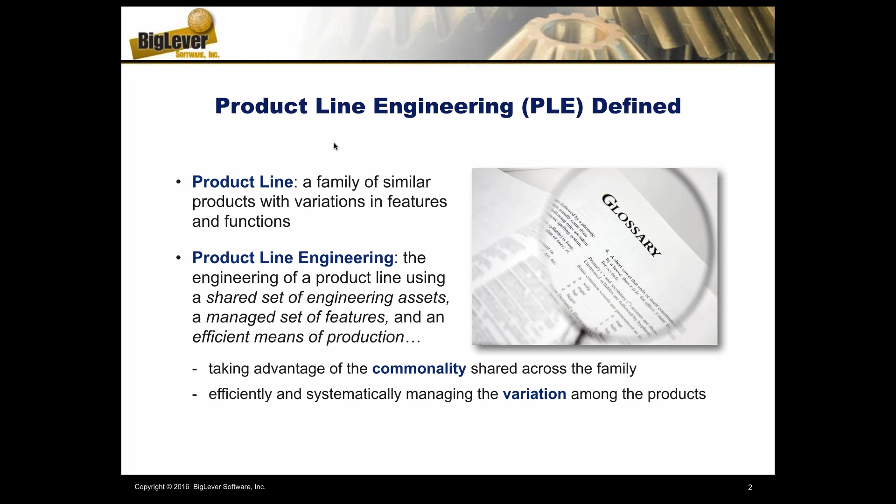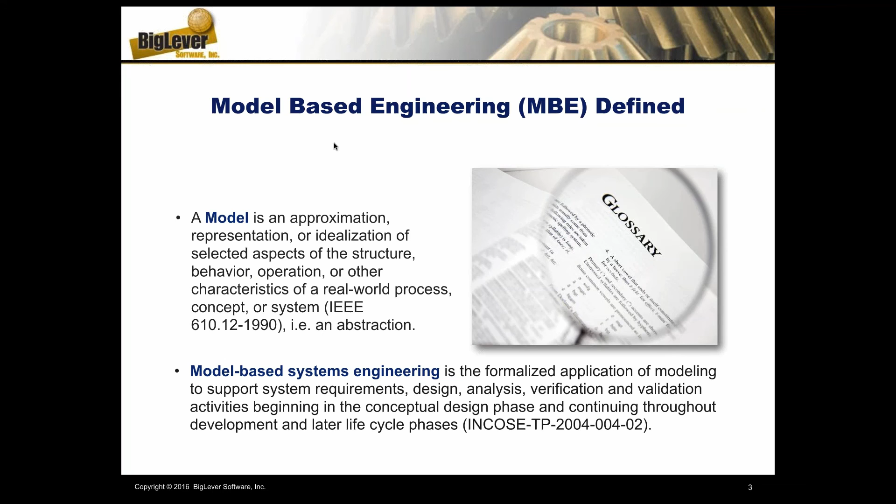The model-based engineering field is probably much more well-known than the product line field, so here are some simple definitions. Models are meant to provide abstractions for real-world systems or processes. For example, model-based systems engineering looks at models in a very formal way to support the systems engineering lifecycle - requirements, designs, testing, simulation, analysis - and we collectively refer to systems and software model-based engineering as model-based engineering, as a unified concept.

Just a little background on BigLever. Our role in the community is very focused on product line engineering - that's all we do, that's all we've done for our 15-year history in commercial practice. We have tools, we have methodology, and we focus on the organizational change required as you're adopting product line engineering into an organization. It's a different way of working, a different way of thinking. It requires more change to the organization and culture of a company than a lot of other engineering disciplines, so we focus on helping companies deal with those organizational change issues in product line engineering.

We have a framework that enables us to create ecosystems and partnerships, and our partnership with No Magic, for example, is our way of bringing Magic Draw Cameo into the ecosystem to make product line engineering work as an extension to those particular tools. Our framework and ecosystem are designed to help end organizations use the tools and assets they have selected and have been using historically, but extend those in order to better support product line engineering.

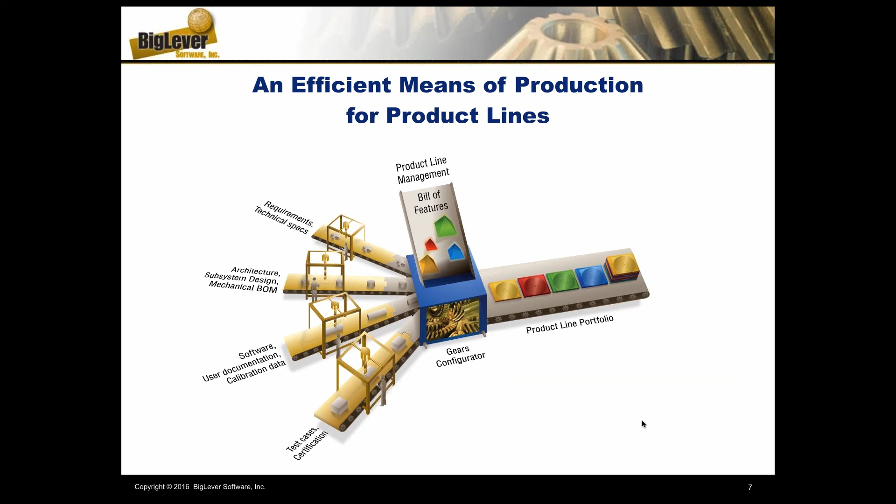The factory in this case is not producing physical artifacts, it's producing the digital assets that we use in the engineering of a particular product family. So you can see here on the left side of our conceptual abstraction about this product line factory, the supply chain coming into the factory in the middle comprises all sorts of artifacts found across the systems and software engineering lifecycle.

So things like requirements, designs, could be mechanical bill of materials, could be user documentation. All of these things that are produced to support a family or a portfolio of products, we're going to engineer in a way that enables and supports an entire product family to be supported from that collection of assets coming in on the left. That supports our entire product family.

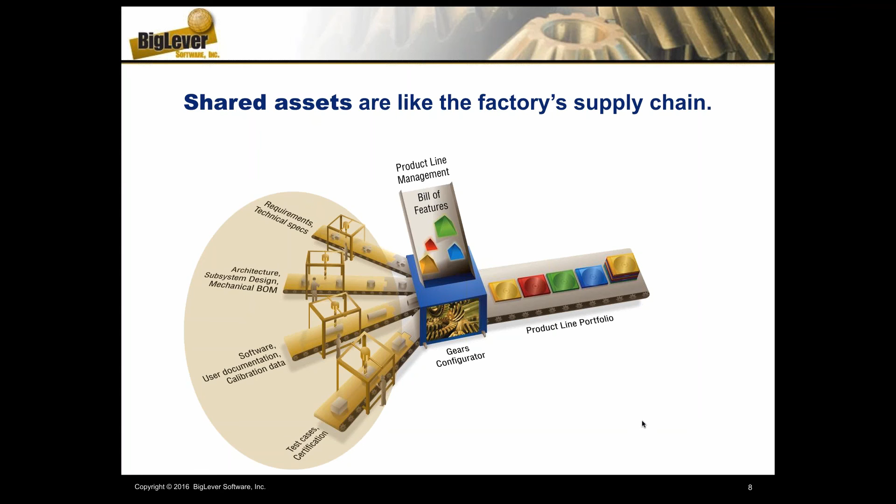To help drive the automation, we use this abstraction I mentioned earlier, referred to as the features. There are a lot of definitions of what's a feature across the engineering field, but in this case it's a very specific definition intended to provide features from a product line perspective. It's those differentiating characteristics that identify those things that are different from product to product in a product family.

You can think of it like the options. When you go buy a new car, you have a list of options—what features do you want on your vehicle and which features do you not want on your vehicle? So you can think of this as a very abstracted view of variants and options being offered on a particular product family.

And then the second piece of that is for every product we want to produce in our factory, we go to the feature catalog and choose which features we want on this product, which features are not needed or not desired on this particular product. So you're stepping through your feature catalog of offered feature options, and picking and choosing what's in and what's out for a particular product.

So you'll get a collection of this bill of features, one profile or one definition of features for each product that you want to produce in your product family.

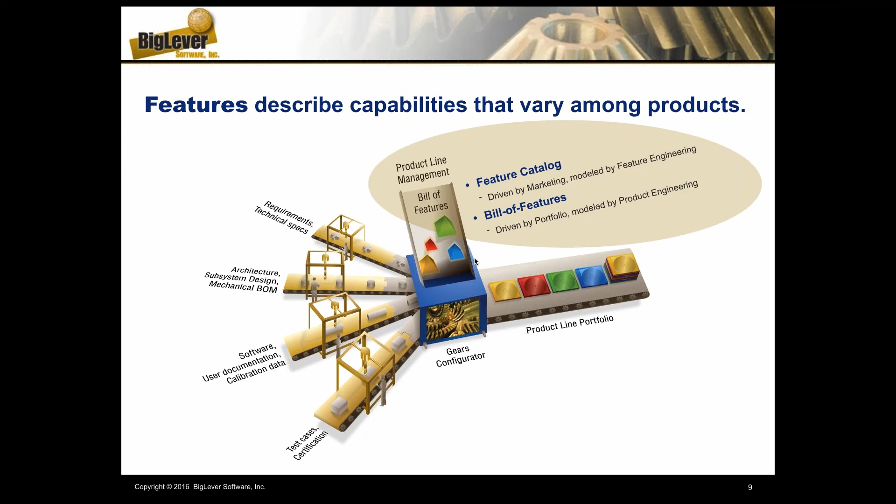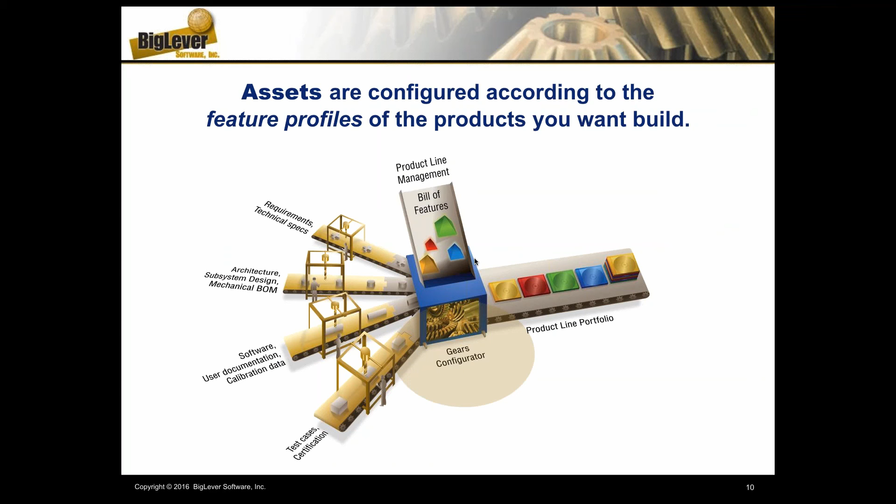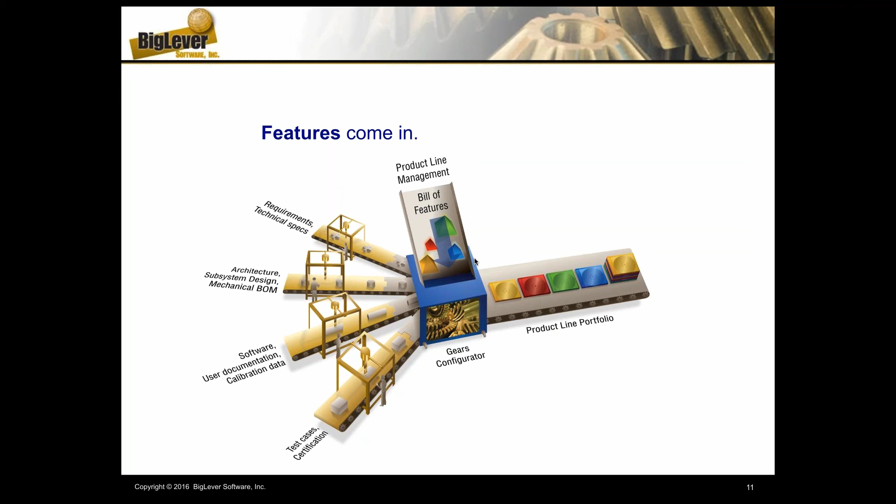Then we apply automation, and the automation will look at that model of the features that we want. It will look at the assets coming in from the left, and it will produce the appropriate product asset configuration to support that feature set. So the bill of features comes in the top—that's the request of the product configuration we're interested in.

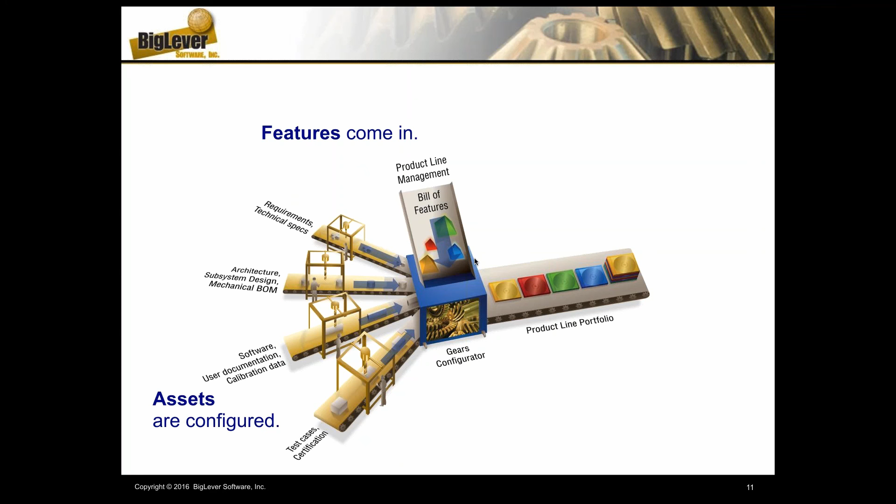The assets that are created and available to support that come in from the left side of our factory, and then a product comes out that matches our bill of features characterization that gives us requirements, designs, source code documents, whatever assets are being managed in a product family. Those things will come out the right side of our factory, and we can do that for many different configurations of product within a product family. So conceptually, it's just like a factory working on the digital assets that we use in the normal systems and software engineering lifecycle.

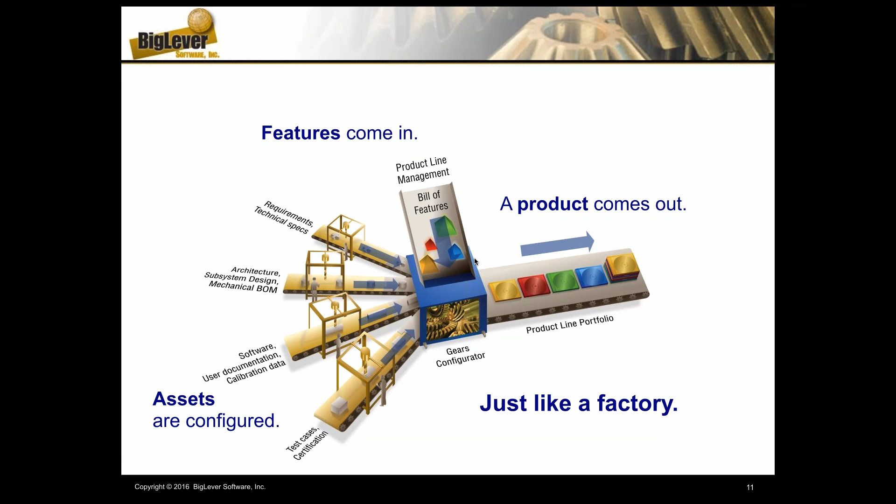This is in contrast to the way historically we've thought about building product families in the industry. Historically it's been what we refer to as product-centric. You tend to think of what do I need to do to deliver each product, and then we coordinate with the other products being delivered out of that product family to reuse, share, or take advantage of things that are common. So we see a lot of branching, merging, cloning, owning, copying, and talking to people in the hallway to get this particular job done.

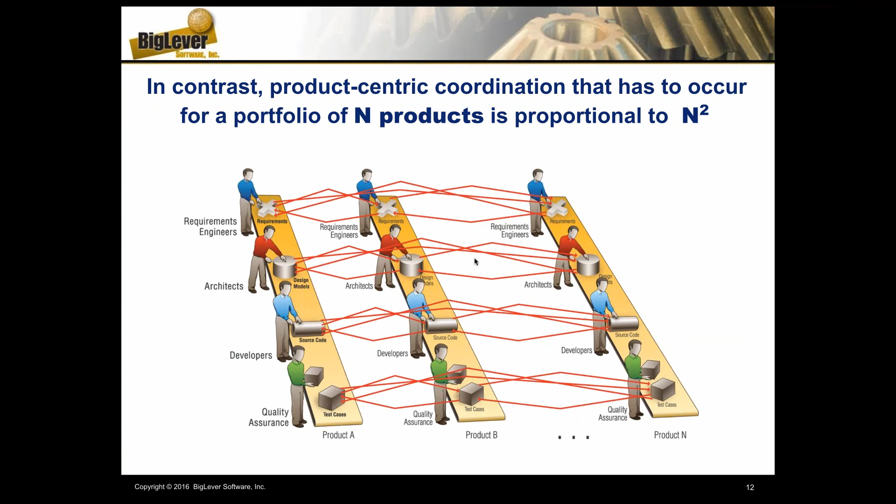The reason this approach has reached its limit of value in the industry is that if you look at a product family with products in it and do the math on the red lines of communication and coordination required, those red lines are proportional to n squared. So as you add more products to your product family, the complexity of managing things this way grows polynomially. We know eventually our engineering capability will be overwhelmed by complexity under a polynomial complexity growth curve. So what we're doing with product line engineering is asking, can we come up with a new approach to tackle n squared complexity?

Of course the answer to that is our product line engineering, feature-based, factory-based approach to doing this. That will bend our complexity curve flat so that we now have a linear growth in complexity as our product family grows over time.

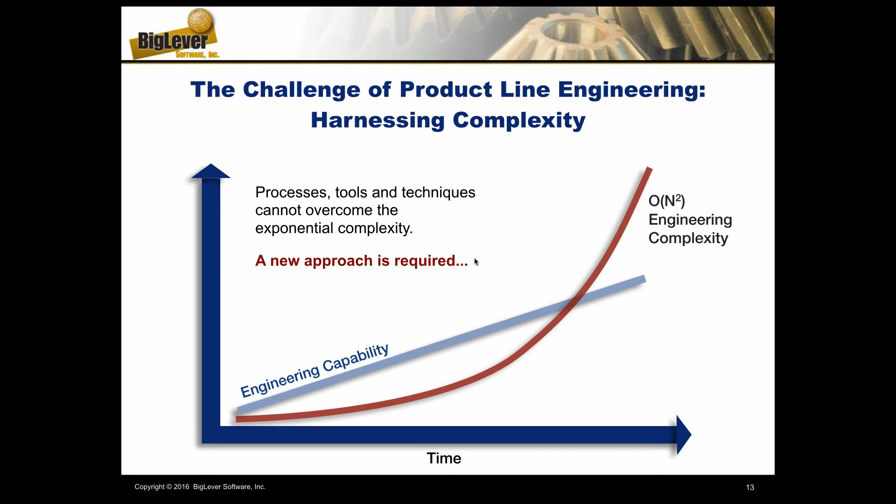We're going to create a model of the differentiating characteristics. Our feature model is going to drive the process coming in from the top so that we can feed in the various feature profiles to automatically configure and generate the assets that are needed for product A, product B, and product N.

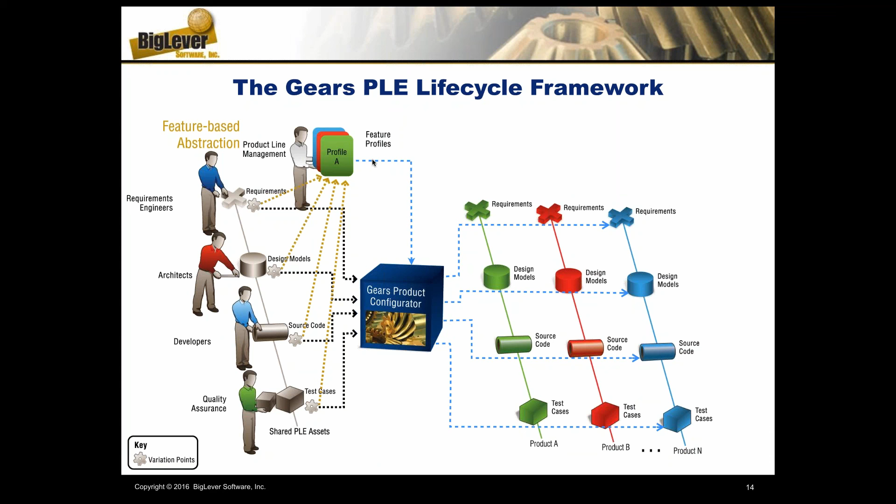So thinking ahead, when we talk about our integration with Magic Draw, what we've done is create, through our integration, the ability to turn model elements into variation point model elements. These model elements are part of our design model over here on the left, but some pieces and parts of our models are now optional or variant, and those are related back to the BigLever feature model that we use to drive the configuration and the automation.

So what this does now is our engineers over there on the left, they can think very broadly across the entire product family. You'll create your designs, your requirements, your assets across the lifecycle according to features, thinking broadly across the entire product family rather than engineering one product at a time according to the old siloed view of the world where people were huddled around and focused on individual products.

We talked about reducing the complexity, the n-squared complexity problem. We can see now how this happens. If I find a defect over in a product that was delivered out of my factory on the right, I ask the question: what is it inside of my factory that caused this defect to show up in a delivered asset coming out of the factory? And so we can find the root cause of that issue.

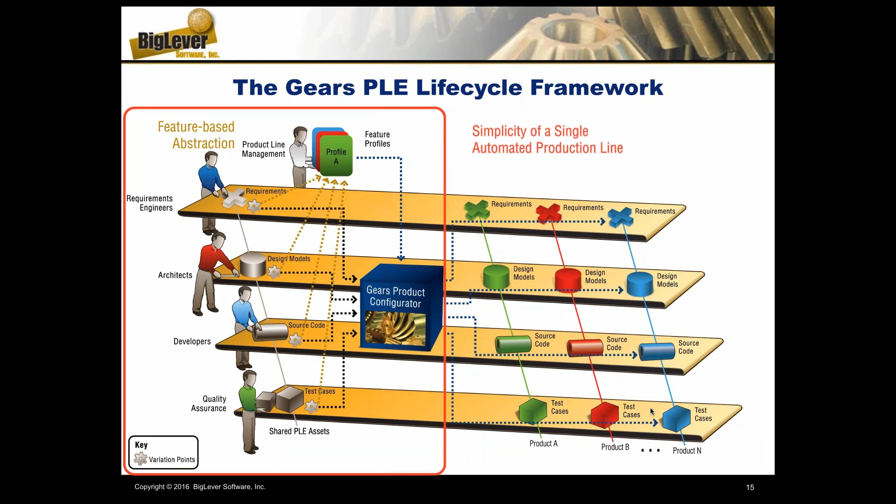We can fix it once inside of the factory, regenerate that product, or maybe the set of products that are impacted by that defect. Now we find the issue once, we fix it once in the factory, and we're going to regenerate anywhere from 1 to n products and redo the delivery there. But because it's at most n products we're delivering, we've reduced our complexity down to order n. We're no longer dealing with this cross-product complexity, because everything goes back to the factory as the single source of the truth about where artifacts are created, engineered, defects are fixed, enhancements are made, and so forth.

So this is really the key. If we look at what we've done under this approach, we still do all of those things we do in the engineering process. Whatever your organization does, every organization tends to have their own unique layout of the engineering V lifecycle. People will still do their requirements and their code and their models and bill of materials and their tests and their user documents, their calibration data. Whatever it is that you do today, you'll continue to do that.

But now what's happening is that sitting in the center of the V, there's a new model being introduced. It's this product line diversity model about features. Everybody, no matter what asset they're building, is looking to that feature model and saying, what are those things I need to support in my particular discipline across the engineering lifecycle? What are the ways that this diversity and variability being modeled in that feature catalog, how does that impact my work?

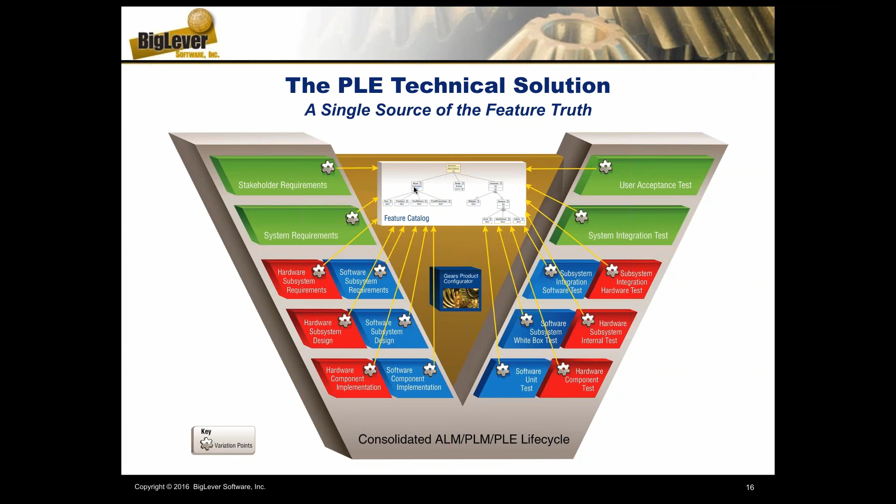So now if we take that and say, what does this really look like in operation? What are the new roles and responsibilities that an organization needs to support? The answer to that is shown here.

As we decide which products need to be produced in our product family, either through commercial market studies, or if you're in a business model where you're producing specific products for specific customers, then these would be customer-driven feature choices being made for each of the products you deliver.

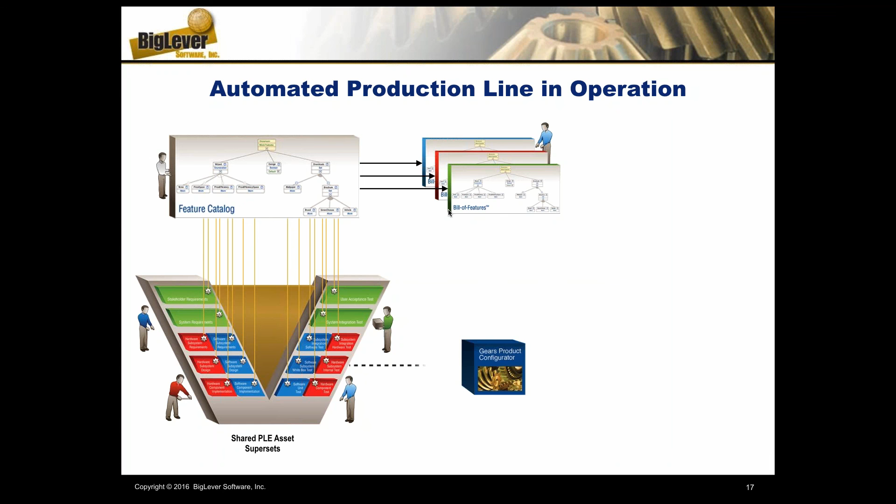Once this is in place, now you can do the fun part, which is feed these profiles into the automated configurator, and out on the right-hand side comes a filtered set of assets that are filtered according to the features in the bill of features profile.

So a couple of questions, let me look here real quick in my question queue. One is, will a presentation be available as a PDF? Yes, we can certainly make that available.

I'll coordinate with our friends at No Magic to figure out how we can get those distributed to you. And the AP 233 standard, I am not familiar with that one, so I actually would not know the answer to that question. Maybe if you can type in more detail about what that is, I'll be happy to look into it. There are a few standards for product line engineering and model-based engineering that have come online. ISO, for example, has a product line standard, and I'm on the committee that helps devise that standard. So we tend to do whatever we can to adhere to and follow those standards as we go.

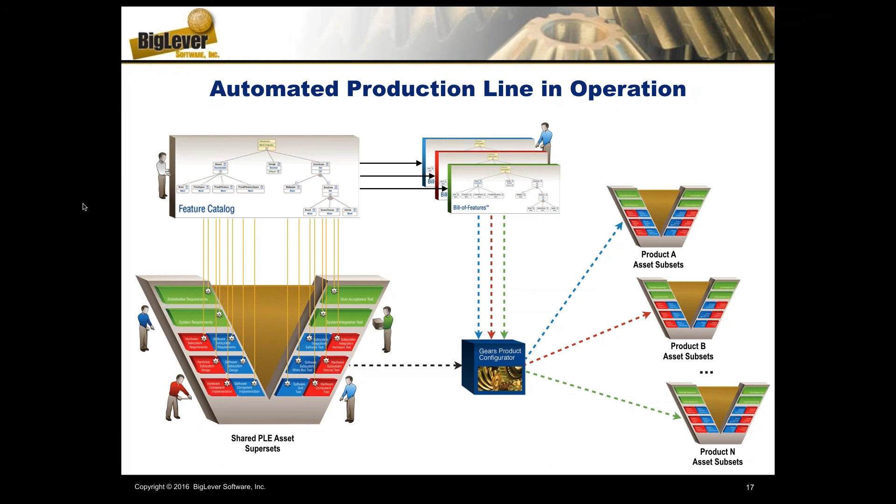So if we look across the life cycle, the way organizations and individuals absolutely need to work under product line engineering is to continue using the tools they know and love and work with. It would be really bad if we said, to do product line engineering you need to start from scratch and use a whole new set of tools, that you have to get rid of your old tools. That would be silly, and nobody would ever do that.

So what we do is represented here in this ecosystem. On the right, we have this product line framework that we provide from BigLever. There's an API that provides access and integration, giving other tools access to the feature models, the automated configuration capabilities, and the ability to create variation points in your assets.

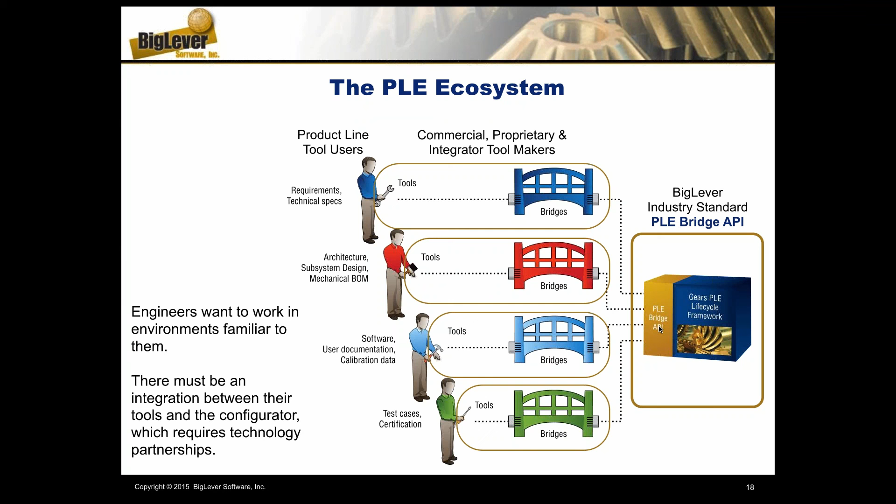For example, in our No Magic integration, what we do is create a bridge between that tool and the API, and by creating these bridges, that's what adds a tool into the PLE ecosystem provided here at BigLever. So there's a long list of partners.

We tend to be very customer driven. If we have a customer that wants to do PLE, they'll request integrations that are currently not in our portfolio. We're of course focused today on the No Magic integrations into this ecosystem, but most organizations have a significant collection of tools from a lot of different vendors, and we try as best we can to support the needs of our customers.

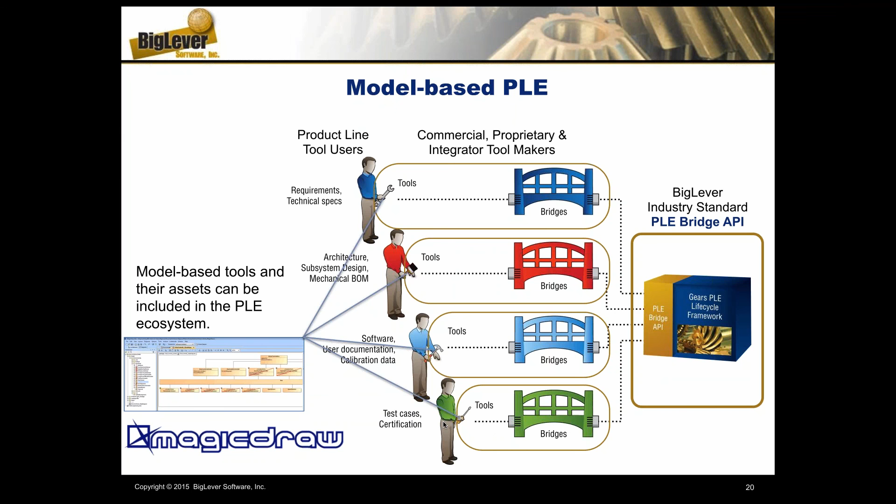From a MagicDraw point of view, however you use MagicDraw—whether for requirements, system design, model-based software development, or model-based testing—you can think of how that integrates across the life cycle to get your work done. The bridge and all the work to support that is now in place, thanks to a very nice collaborative effort we've done with the No Magic organization.

One of the subtitles I put up when we started is that product line engineering is really a new dimension in model-based engineering. That's a way of thinking about the relationship between model-based and product line engineering. I have a couple of slides here to point out what that really means—how do you think of this new dimension or new facet of model-based engineering?

From a product line point of view, we use this slide to say that in order to have a complete technical solution for product line engineering, you need this multi-product dimension, which is what we've talked about a lot so far today—how do I get product A, product B through product N delivered out of a factory? We've referenced the idea that this is not just for one particular asset type; it needs to support the entire systems engineering life cycle.

The issues in this multidiscipline dimension relate to traceability and common techniques, and the single source of truth about features and how it impacts all of these artifacts. How to bring product line engineering into multiple disciplines is a key part of a solution. And of course all of this has to evolve over time—when you do this, you don't end up with a set of shiny reusable assets that sit on a shelf for months and years on end.

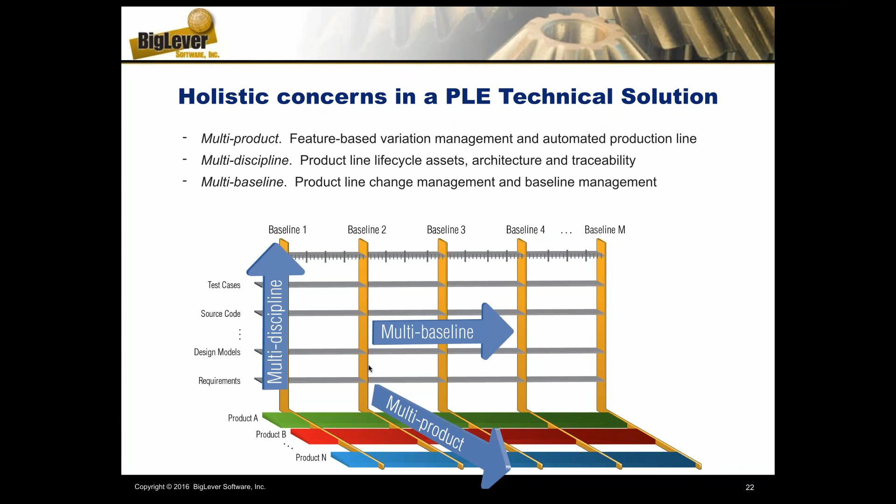So how this relates to model-based engineering versus feature models, oftentimes people at first glance will say, well, hey, I can just model features in my UML or my SysML models. Why are you giving me something additional to work with? Well, the answer to that is sort of reflected in that previous slide. They're really separate concerns. So in your model-based models, you're modeling things about your particular domain, your particular system, your particular family, behaviors, concepts, constructs.

The product line feature models are looking across the product family and saying, let's look at those differentiating characteristics. What are those concepts that would cause one product versus another product to be different within my product family? So it's not now talking about behaviors or concepts in the actual systems that are being delivered. It's in that orthogonal dimension that says, let's talk about the options and the variants and the differentiating characteristics. By keeping those concerns separate, it's going to simplify the comprehension, the reasoning, the rationale behind what's in your feature models versus what's in your system and your software design models. So that's sort of a key piece that we've discovered really helps simplify the overall process.

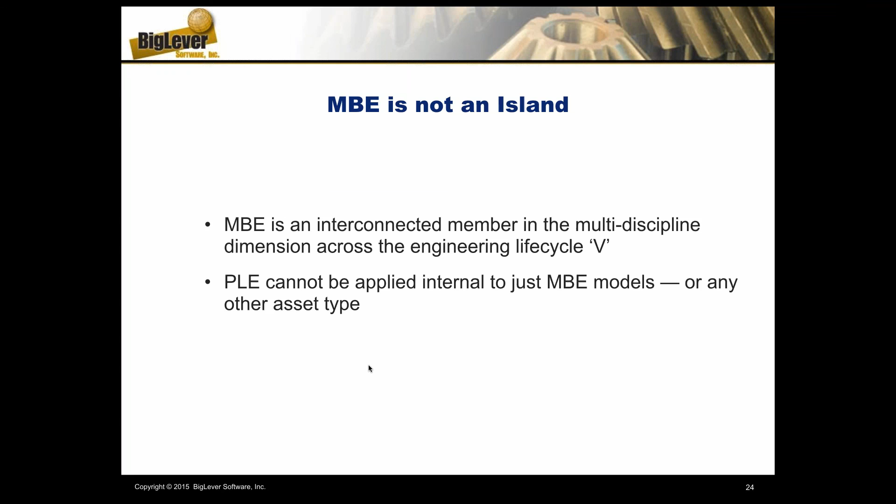Okay, so before we jump into the demo, just want to mention that as well. The tools and the technology we talked about, there's some additional activities that need to be supported. We talked a little earlier about organizational change. You can imagine that moving people under a factory approach will create new roles, new structures, new process, and so there's organizational change that occurs. In order to best support that, we tend to get the business involved in this as well to really connect all of this change with the business objectives and business opportunities. And so we have a methodology that supports not just the technological ideas here, but the organizational, the process, and the business objectives, and getting all of these things connected together.

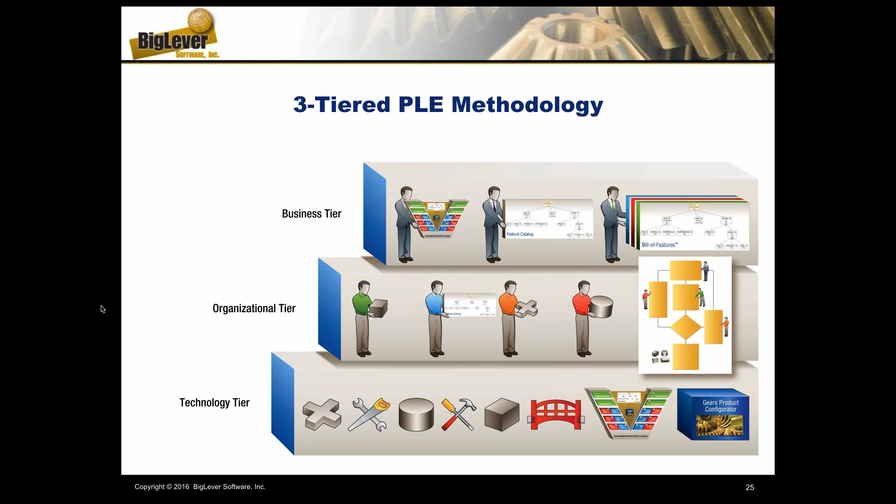Moving ahead here, again, just to summarize, the idea is we're looking to really significantly improve engineering through this product line engineering approach, high degrees of automation, high degrees of modeling, variance, and options, and going from there.

Okay, looking at a couple of other questions then. The STEP standard, that one comes up every now and then. I'll just have to say that we're not deeply involved in that one at the minute, but we'll certainly be looking at that as part of the exchange standards and how this could be supported. You know, we do work with things like AutoSAR and other standards that are coming up for similar concepts.

Integrations with CATIA, MATLAB - in the mechanical world we currently have integration with the Aras tool, bill of materials tool there. We're in discussions with other mechanical PLM tools and CAD tools organizations. This piece of the process, this PLE, product line engineering world, really started as a pure software discipline, emerged into a systems and software discipline, and now, in the last year or two, we've been successful in starting our move into the mechanical world as well.